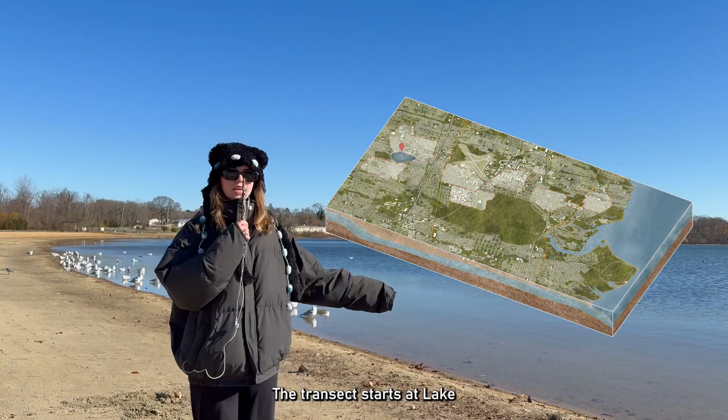Welcome to Ronkonkoma, Bohemia, and Oakdale, 3 hamlets in the town of Islip, Long Island. The transect starts at Lake Ronkonkoma and extends down to the southern shore to the Great South Bay. It houses around 30,000 residents and sites like MacArthur Airport, a foreign trade zone, and Connetquot State Park.

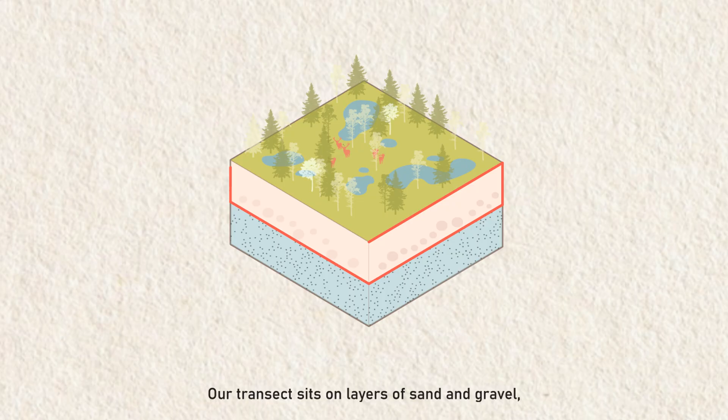Our transect sits on layers of sand and gravel, which are porous, where rainwater can easily seep into the ground and form the aquifer that stores Long Island's drinking water. The top of the saturated zone is called the water table, and in this part of Long Island, it is very shallow, less than 10 feet below the surface in areas like Oakdale.

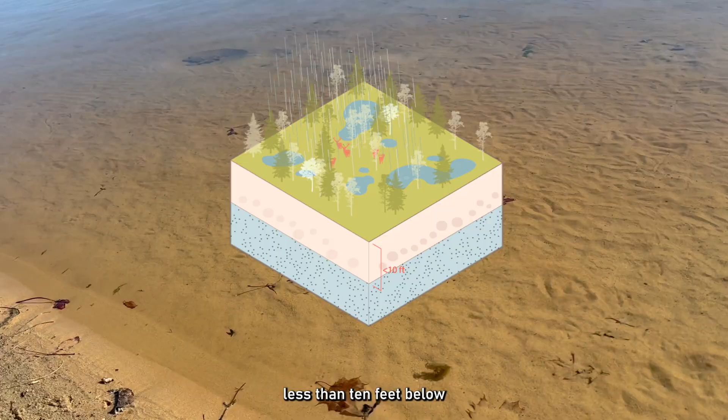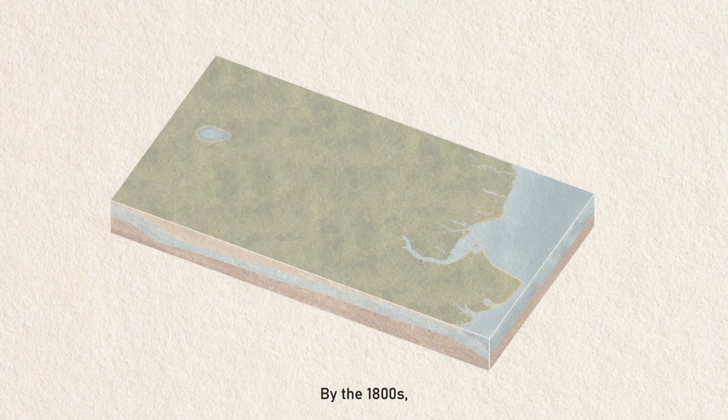The area around Lake Ronkonkoma was originally inhabited seasonally by Native Americans. English settlers arrived in the 1600s and divided it into the townships that exist today. By the 1800s, the Long Island Railroad reached Ronkonkoma, turning the lake into a resort for wealthy New Yorkers. Large estates like the Vanderbilt and Bourne properties were built on the Oakdale waterfront.

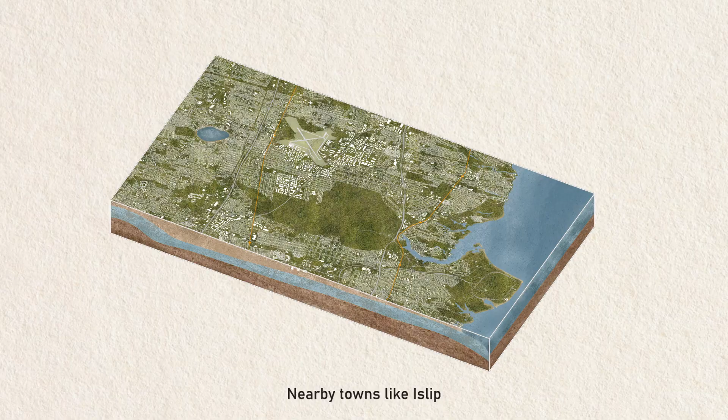By the mid-20th century, the area was in the middle of a massive suburban boom, and with all that growth came a whole lot more shit. Most homes relied on cesspools, basically holes in the ground that dump water straight into the soil. Nearby towns like Islip and Smithtown built sewer systems, but everything east of Connetquot State Park stayed unsewered.

On top of this, low-density development brought more roads, parking lots, and impermeable surfaces, interrupting the natural filtration of rain. Car-dependent lifestyles added oil and other contaminants to paved surfaces, while large lawns require heavy fertilizer and pesticide use. In Bohemia, industrial dumping made matters worse, leaving the area with more than 10 Superfund sites.

Today, groundwater contamination has become a major regional crisis in Suffolk County, fueling algae blooms and making Lake Ronkonkoma unsafe for swimming. Turns out decades of shit don't make for great beach days.

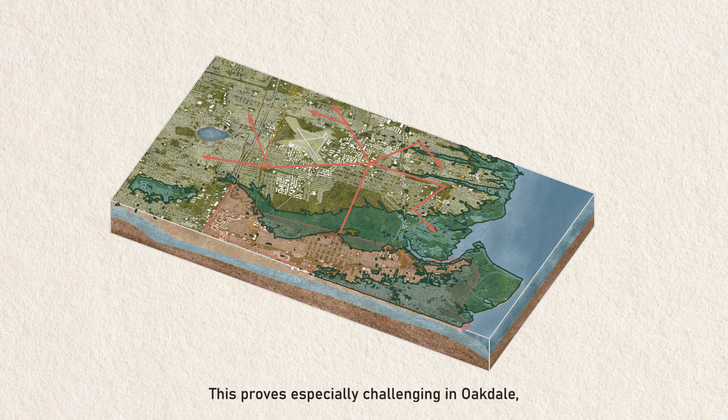Suffolk County has proposed extending sewers from the Southwest Sewer District, which requires pumping against the topography and major construction to connect every home. This proves especially challenging in Oakdale, where there isn't enough depth to install pipes that meet state regulations. Progress has been slow, both due to logistical challenges and strong resident opposition. The water crisis remains largely unacknowledged by local residents, as it's an invisible problem with long-term rather than immediate consequences.

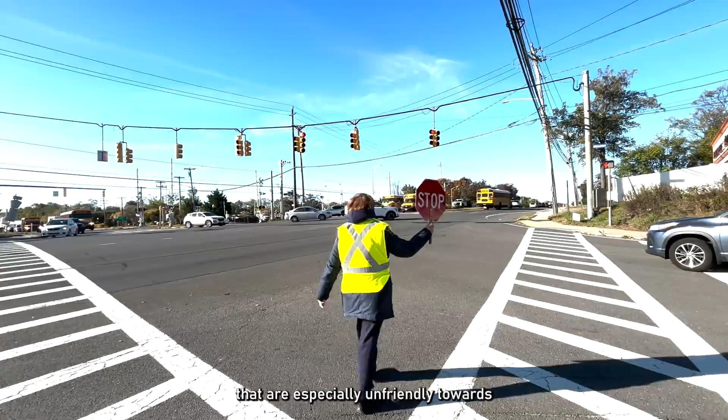Residents face other, more visible issues tied to suburban sprawl. Car-dependent roadways, poor pedestrian conditions that are especially unfriendly towards elderly and children, unreliable public transit, which means that cars are needed to reach basic needs like groceries, schools, medical care, and recreation.

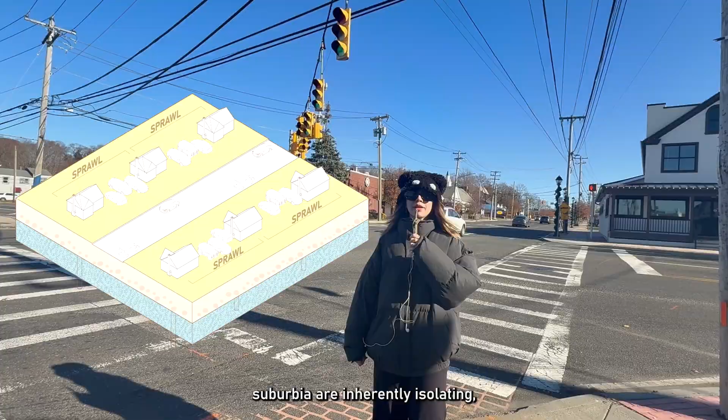The development patterns of mid-century suburbia are inherently isolating, and they encourage individualism, which not only makes grassroots initiatives harder to form, but also weakens everyday social life. Several residents have noted there's simply not much to do around here.

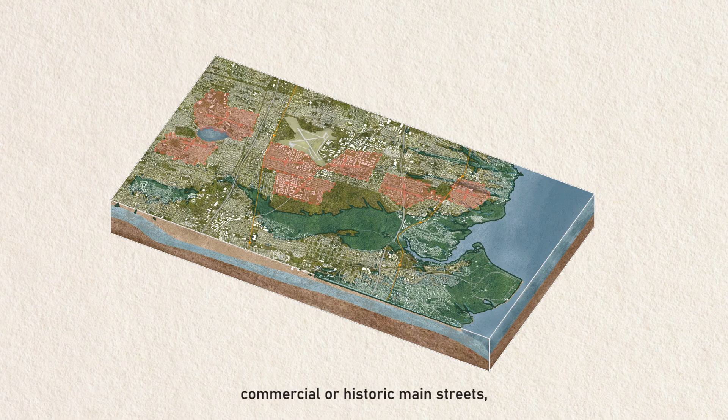We selected these towns based on existing commercial or historic main streets, and that also sit on higher, safer ground. Areas that are less vulnerable to coastal or pluvial flooding and that have deeper water tables. Each town is defined by a 10-minute walking radius. We establish pedestrian-oriented main streets that lead residents towards the town center and become the spines of growth. They are lined with mixed uses to create an engaging walking experience.

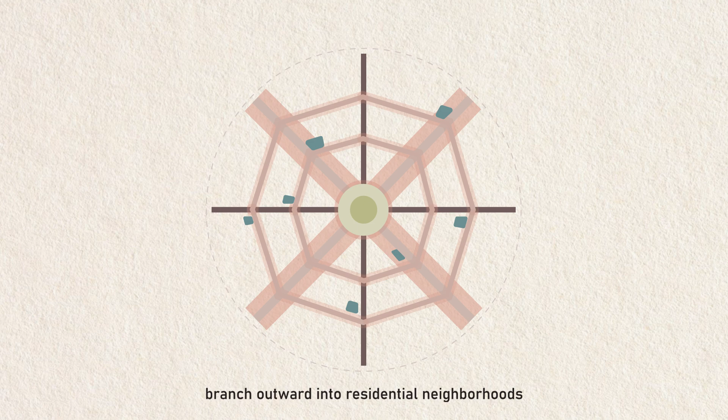They have shops, cafes, sheltered public space, and pocket parks so that daily needs stay within comfortable walking distance. Smaller pedestrian streets branch outward into residential neighborhoods while maintaining vehicle access through back roads for utilities, emergency services, and residents' private cars. To sustain retail and activities, housing can be densified in a few ways that retain the known and loved open space and proximity to nature.

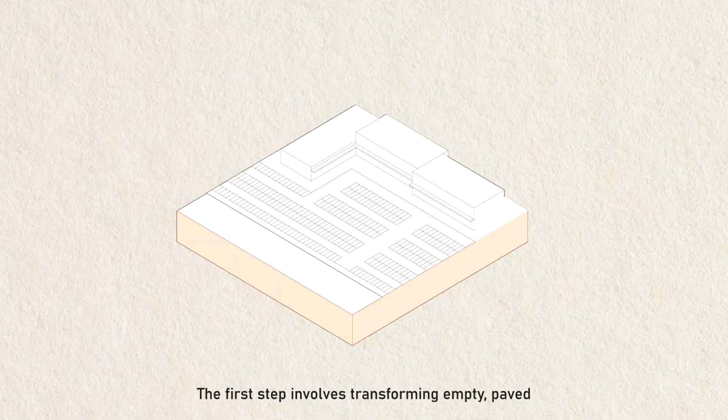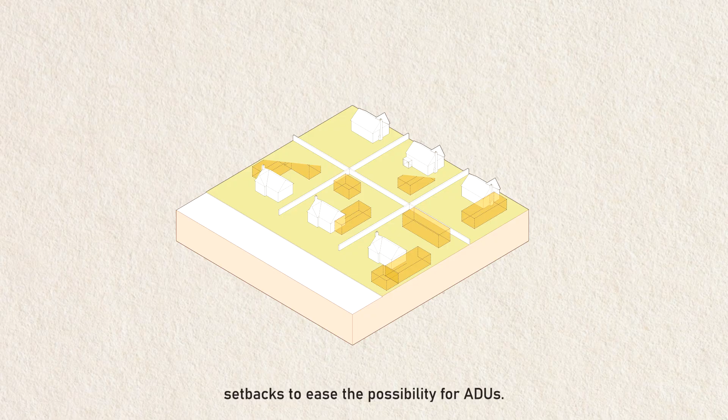The first step involves transforming empty paved lots or parking areas along the major pedestrian streets into mixed-use development. Second, we propose upzoning to encourage multifamily homes and reduce setbacks to ease the possibility for ADUs. Tax credits and other incentives can also support this transition. Existing residents may also sell unused portions of their lot to a community trust. Newly available land opens opportunities for new housing typologies.

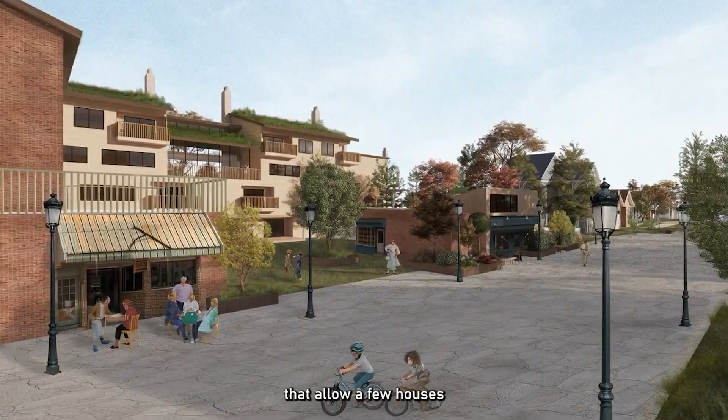This includes courtyard-style clusters that allow a few houses to share their front yard, which means bigger yard spaces and sharing maintenance costs of facilities like swimming pools. Denser typologies like sixplexes and mid-rise apartments increase housing affordability, which gives younger Long Islanders an opportunity to own a home close to family and community networks.

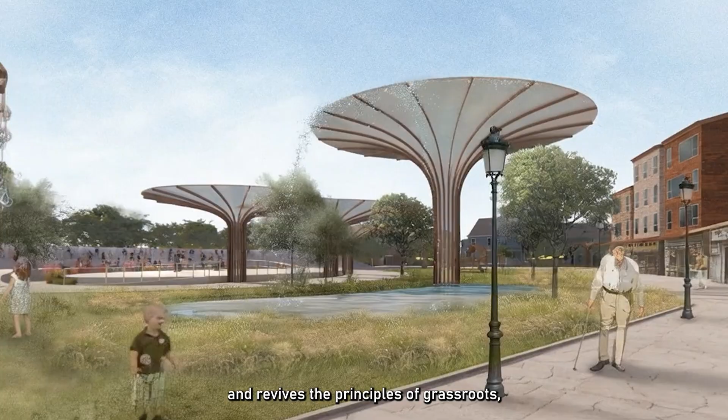These shared facilities and more spaces to just hang around facilitate social interaction and revive the principles of grassroots, people-centered neighborhoods that problem-solve together. One node can house 15,000 residents at full capacity. But wait, with all this new density, what happens to all the waste?

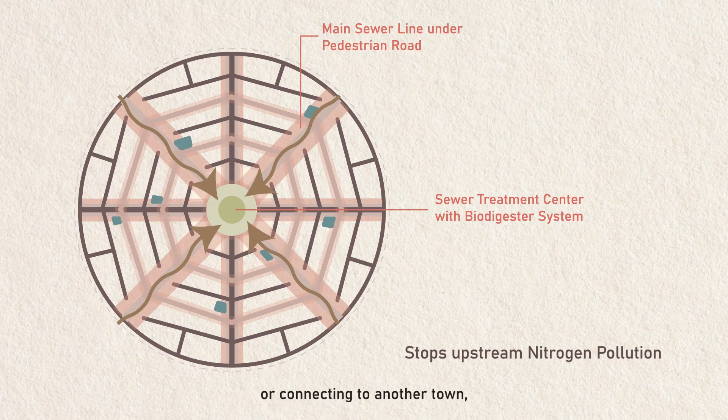Well, each node is designed to run its own complete wastewater treatment system, eliminating the need for cesspools and septic tanks. Instead of relying on a large, transect-wide sewer network or connecting to another town, these decentralized, neighborhood-scale treatment hubs sit at the center of each new town. The hubs are built mostly underground, with sculpted terrain above that creates a public park and community space.

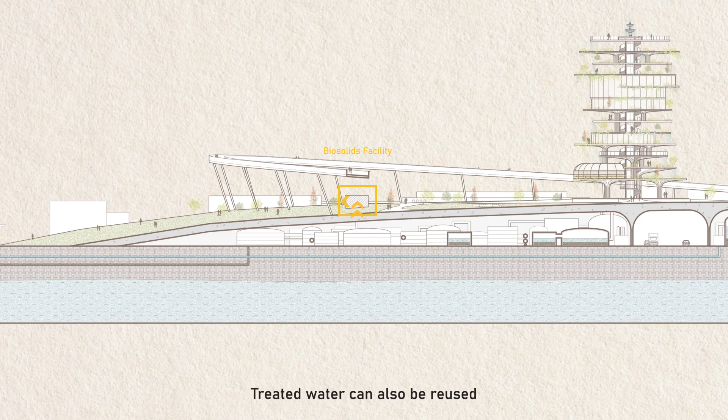Sewage pipes run from surrounding homes beneath the new pedestrian streets to the central hub. The system includes a biosolids facility that treats remaining sludge and converts it into fertilizer for use in surrounding landscapes. Treated water can also be reused for irrigation, cooling, water features, and toilet flushing throughout the node. And because each node is self-sufficient, the system avoids a single point of failure.

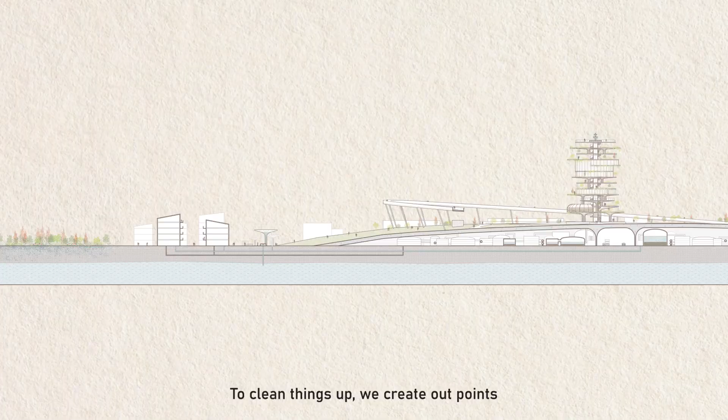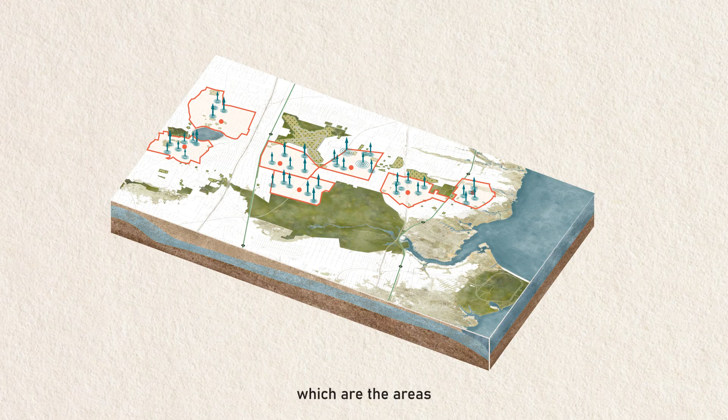The final step is dealing with all the existing pollution already sitting in the groundwater, and making sure that the water cycle actually recovers in the long run. To clean things up, we create out points, places where polluted groundwater gets pumped out and treated in small underground facilities. These are located in the denser, historically industrial parts of the transect, which are the areas hit hardest by cesspools, chemical dumping, and decades of accumulated waste.

But if we're pumping water out, we also need to put clean water back in. So across the transect, we identify the in points, restored to absorb rain and runoff through rewilded, permeable landscapes that naturally recharge the aquifer. Prime spots for this include major channel junctions like the unused lawn areas of MacArthur Airport, which could be restored into grassland or marshland to better filter stormwater back into the aquifer.

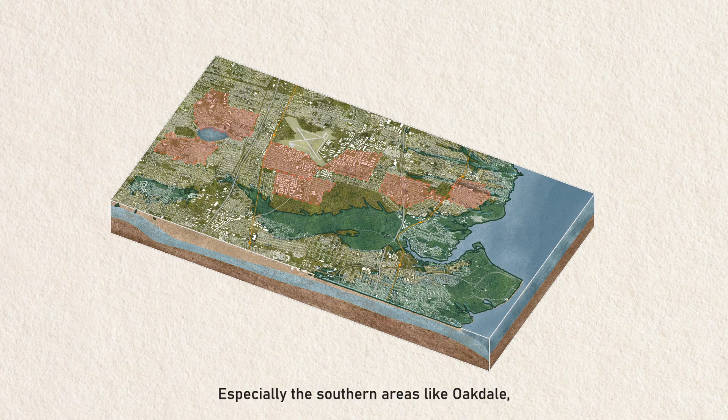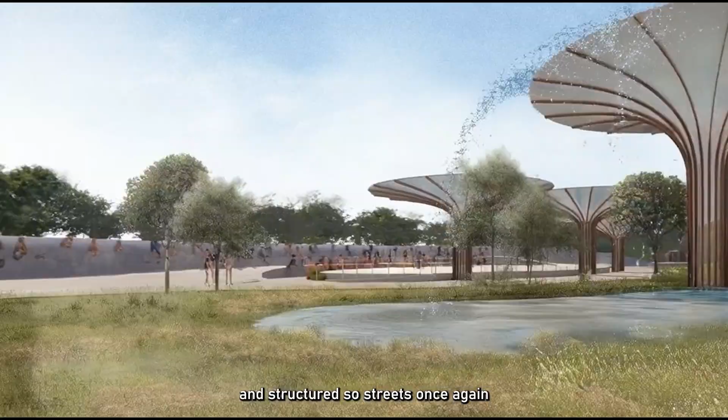Our nodes are designed with the understanding that large portions of the transect will become uninhabitable as climate change accelerates, especially the southern areas like Oakdale, where shallow groundwater and chronic coastal flooding already threaten hundreds of homes. The new towns are built to be friendly to aging residents, welcoming to younger newcomers, and structured so streets once again belong to the people instead of cars, with daily needs just minutes away.

What emerges is a new model of suburban living, keeping the comfort that people love while offering a more future-ready way of life. And most importantly, it finally keeps the shit out of the water.